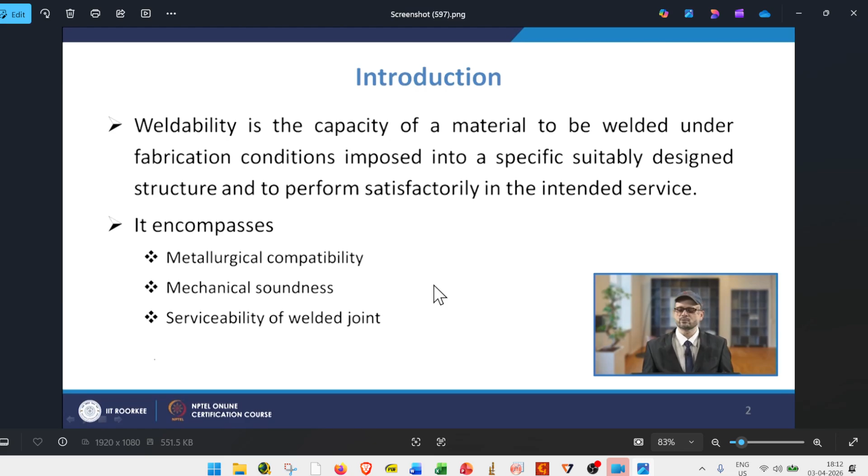if you do any tensile testing, the base metal should fail before the weld joint. That is the general consideration for good welding. Next is serviceability of the weld joint - in terms of corrosion or any other application we are using, it should be the same as the base material.

So what are the effects of alloying elements on weldability? If we have an alloy material with certain kinds of alloys, what effect does it have on weldability? First, it may increase the hardenability. If certain elements are there, carbon equivalent elements like chromium, nickel, and so on,

those may tend to promote the formation of the martensitic phase, resulting in hardenability. Also increasing hardenability from age-hardened precipitation - some particles may form due to age hardening, because we reach a certain temperature and hold it for a certain duration of time, so aging may take place and some precipitations may form.

Also providing grain refinement - some elements can promote grain refinement. And reducing segregation - some segregation of elements can be reduced, and controlling the ductile to brittle transformation temperature. Just like iron, if we go below 0 degrees, it transforms from ductile material to brittle material, so those things we have to control.

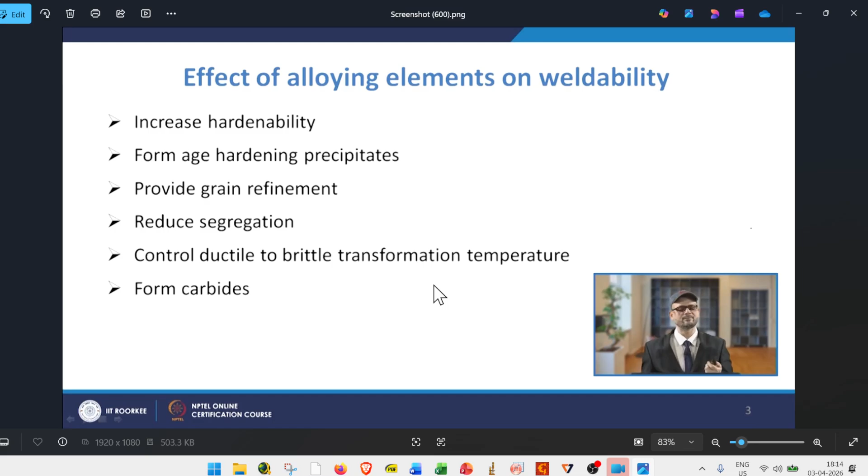So how do we do the weldability test? The purpose of the weldability test is to gather information about the behavior of the material during welding, for establishing the correct welding conditions. It provides useful information about appropriate process selection, preheating treatment required, energy input, and joint design. So the purpose of the weldability test is to see the material's behavior during welding conditions.

So we get information like what welding process we have to use, whether we have to use preheating or not, what energy input we have to provide, and what joint design we have to choose. Weldability tests may be classified as theoretical test, simulated test, and actual welding test.

Theoretical weldability test: in this case, we will do annealing, suppose in case of steels, up to 1150 degrees. Then we will cool it to replicate what happens during the welding condition, what kind of situation occurs. Once the heat annealing is done, we will do bending of that weld bead to 10 to 20 degrees.

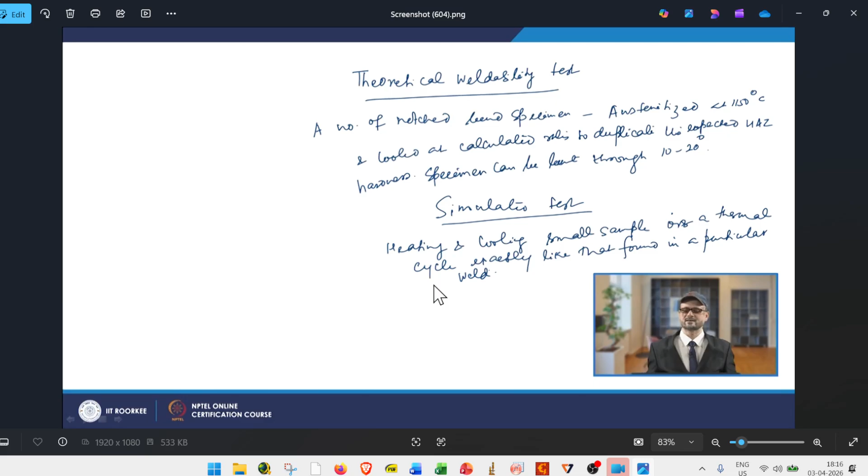Next, simulation test. In simulation test, we will use heating and cooling in small samples for a thermal cycle, and check the formation of the particular weld.

Weldability of the metal is best defined as option A, ease of melting the material; B, ability to form a solid sound weld joint with desired properties; C, resistance to corrosion; D, ability to conduct heat. The answer is not ease of melting the material.

Every metal with a low melting point doesn't mean it has good weldability, that is not correct. Resistance to corrosion, no, that is a material property, not related. Ability to conduct heat, no. So the answer is option B, the ability to form a sound weld joint with desired properties.

Weldability refers to the ease of producing a defect-free weld that meets mechanical and service requirements.

Next, which of the following is not a factor affecting weldability? A, chemical composition - yes, because whatever elements are present will affect weldability. Next, thermal conductivity - yes, if thermal conductivity is high, we have to provide more heat to the material, so that affects weldability. Next, surface roughness - no, because surface roughness doesn't affect weldability.

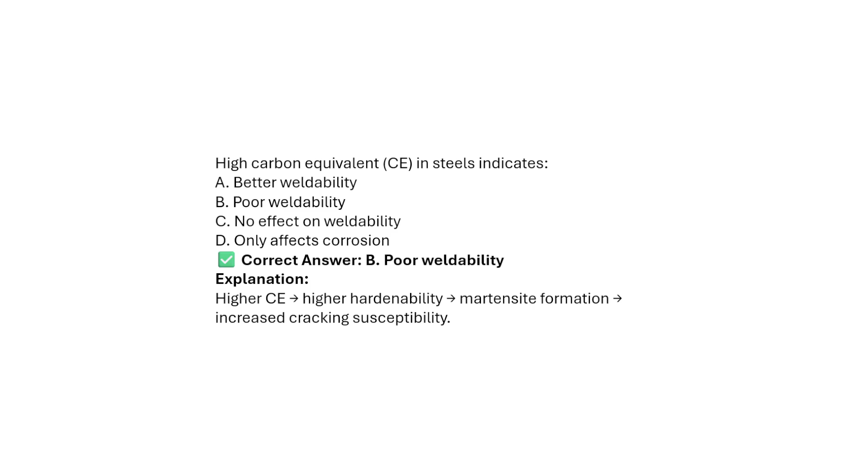Next, which of the following improves the weldability of steel? Which factor improves weldability in steel? Option A, increasing the carbon content. Option B, increasing the sulfur content. Option C, reducing the carbon equivalent. Option D, increasing the cooling rate.

The answer is reducing the carbon equivalent. If you reduce the carbon equivalent, there's less formation of metastable phase, less martensitic tendency, so less susceptibility to crack propagation. So option C, reducing the carbon equivalent. Lower carbon equivalent reduces hardness, which reduces crack tendency and improves weldability.

Which property of the metal strongly affects heat flow during welding? Option A, electrical resistance - if electrical resistance increases, heat generation will be more, but that is not the factor here. Next, thermal conductivity - yes. Option C, magnetic permeability. Option D, density. The correct answer is thermal conductivity.

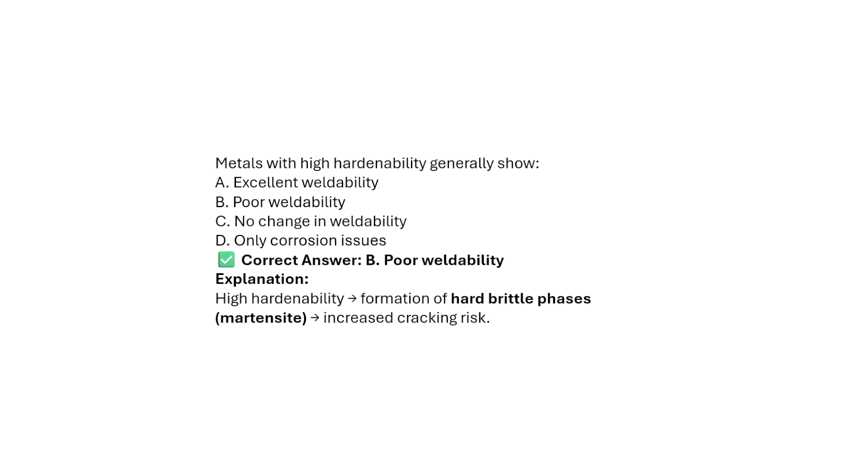Next, which of the following is a metallurgical factor affecting weldability? Option A, joint design. Option B, weld position. Option C, phase transformations. Option D, operational skills. The answer is phase transformation, since phase transformation like austenitic phase to martensitic phase strongly influences the microstructure and cracking.

Which test is commonly used to evaluate the weldability of steel? Option A, tensile test. Option B, hardness test. Option C, carbon equivalent calculation. Option D, impact test. The answer is carbon equivalent calculation.

As seen, if the carbon equivalent increases, it results in poor weldability, so we want to avoid that. We want to choose material with low carbon equivalent for good weldability. So the answer is C. Carbon equivalent calculation provides a quick estimation of weldability and crack tendency in steel.

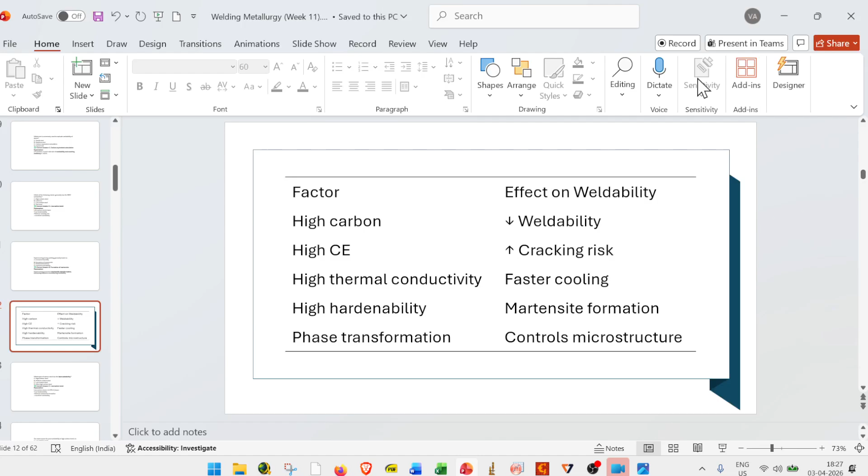Next we move to the next section: weldability of carbon steels. We can classify carbon steel into four categories: low carbon steel, mild steel, medium carbon steel, and high carbon steel.

Low carbon steel generally has carbon content less than 0.15%, used for sheets, strips, and welding electrodes. Mild steel is 0.15 to 0.3%, used for structural shapes and plates and bars, the most widely used material. Medium carbon steel is 0.3 to 0.5%, mostly used for machine parts and tools.

High carbon steel generally has 0.5 to 1% carbon content, used for springs, dies, and rails. From a weldability perspective, low carbon steel and mild steel generally have higher weldability because of low carbon equivalent content, but medium carbon steel is moderate and high carbon steel has poor weldability.

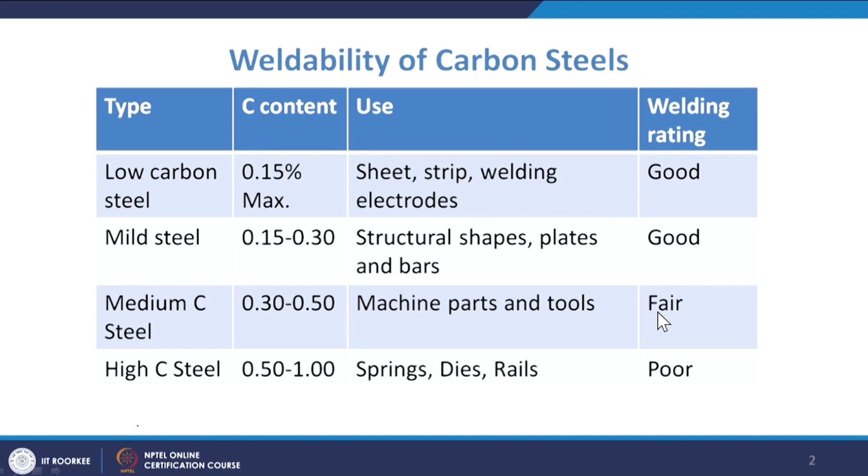Low carbon steels with carbon content up to 0.13% are good weldable steel, but not best for high speed welding, because high speed welding generally produces porosity. If the component isn't affected by porosity presence, then we can go for higher speed also.

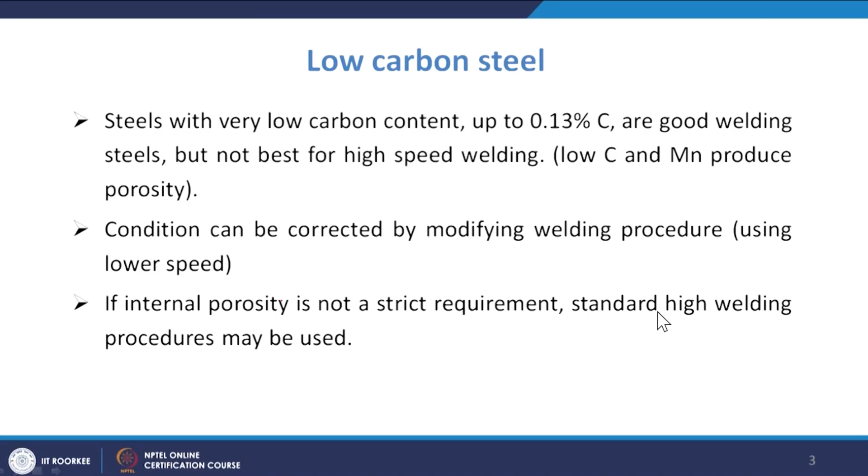This condition can be corrected by modifying the welding procedure, using lower speed. So if internal porosity is not a strict requirement, then standard high speed welding procedure may be used, since low carbon steels generally have good weldability.

Coming to mild steel, similar to low carbon steels, we can have excellent weldability with mild steel. So these are used in maximum production speed on assemblies and structures that required extensive welding. Where components require extensive welding, we can use mild steel because of its good weldability properties. Mild steel with 0.25 to 0.3 carbon content and 1.4 manganese has very good weldability.

Next, coming to the susceptibility to underbead cracking from hydrogen, it increases when carbon equivalent exceeds 0.4 percentage. So heavy sections may require preheating.

Why do we provide preheating? So that the cooling rate is reduced. If the cooling rate is reduced, the martensitic formation will be reduced. Less preheating is required when low hydrogen processes are used. Also, if the cooling rate reduces, any diffused hydrogen has enough time to diffuse out.

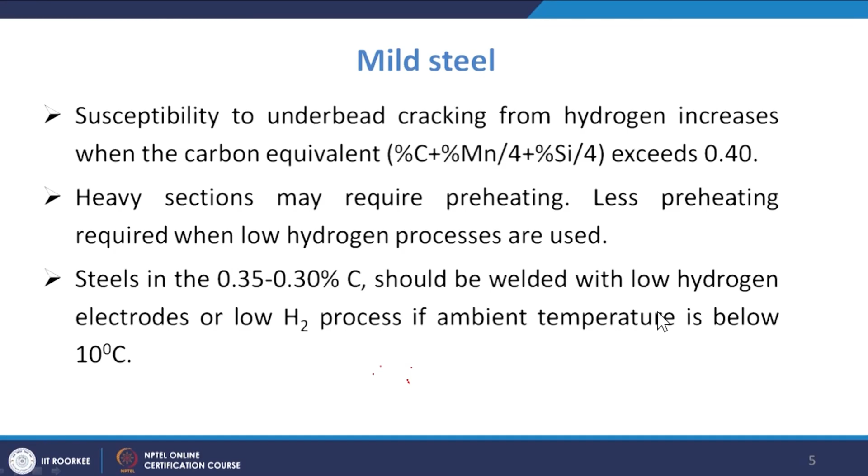Steel within 0.35 to 0.3 carbon content should be welded with low hydrogen electrodes or lower H2 producing electrodes if ambient temperature is below 10 degrees centigrade.

Similarly, medium carbon steel has moderate weldability. As carbon content is increased in the steel, welding procedures should be such as to avoid formation of large amounts of martensite in the HAZ.

Why is it moderate? The main problem is higher carbon content means higher carbon equivalent percentage, so hardenability increases, meaning martensitic formation is much higher. So we have to provide a certain environment so that we can reduce the formation of martensite. How can we reduce it?

One way is providing preheat treatment and slower cooling rate, that will result in slower cooling rate, and to reduce stresses we can do post weld heat treatment. In most applications, medium carbon steel should be preheated prior to welding to control the cooling rate in the weld metal and HAZ.

Preheat treatment depends on the carbon equivalent value, ranging from 0.45 to 0.6 percentage, and may require preheating temperature of 100 to 200 degrees, depending on the welding process and work thickness.

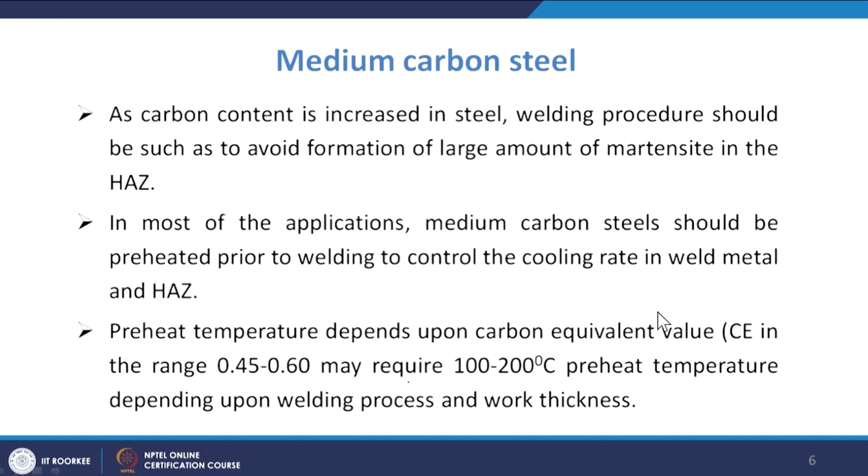For medium carbon steel, low hydrogen welding procedures are mandatory. In multi-pass welding, low heat input is recommended for the first few layers to limit the dilution.

Stress relieving post-weld treatment is recommended immediately after welding, especially in thick sections and high joint restraint, or service conditions involving dynamic loading.

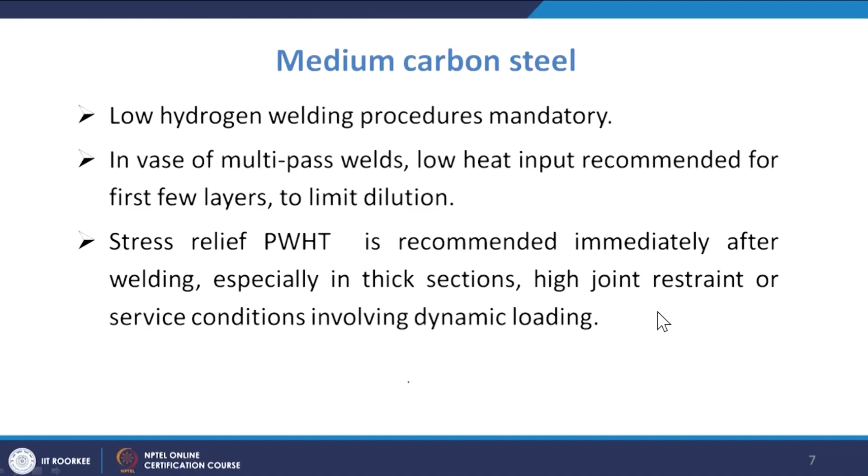Next, coming to high carbon steels. High carbon steels generally have poor weldability, as we've seen. If the carbon content is increasing, hardenability increases, and martensitic formation is more.

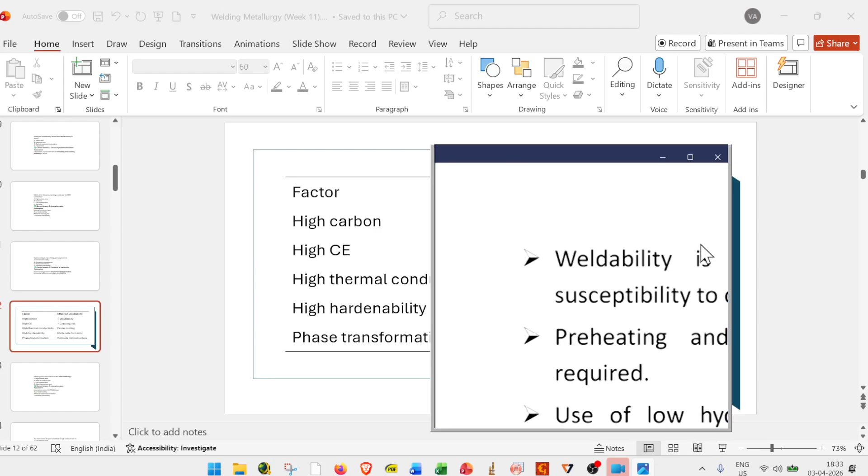To prevent that, if the carbon content is increasing, the preheat treatment requirement and its temperature also increases. In this case, preheat treatment requirement is 200 to 315 degrees, whereas for medium carbon steel it's 100 to 150-200 degrees.

Use of low hydrogen products minimizes the degree of preheat requirement. To reduce the pickup of carbon by the weld metal, the welding procedure should be designed to keep the dilution minimum. Generally if the dilution is more, more carbon element can be picked up from

the base material and HAZ into the weld material. So to minimize that, the weld procedure should be designed so that weld dilution is minimum.

High carbon steel should be welded in an annealed condition and then heat treated, and annealing is recommended prior to repair of broken welding parts. Post weld stress relief is recommended particularly for welding joints of thick sections.

As we said, if carbon content increases, we have to use much higher preheat treatment. If the carbon content increases, the preheat treatment temperature also increases.

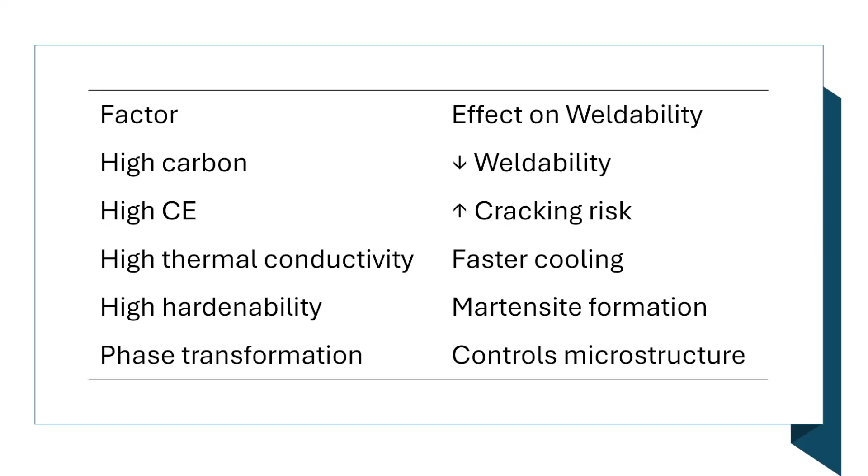Now we can move to some problem solving for this lecture. Which type of carbon steel has the best weldability? As we've seen, the one with lower carbon content has good weldability.

Option A is high carbon steel, option B is medium carbon steel, option C is low carbon steel, option D is ultra high carbon steel. The answer is C, since low carbon steel and mild steel both have good weldability.

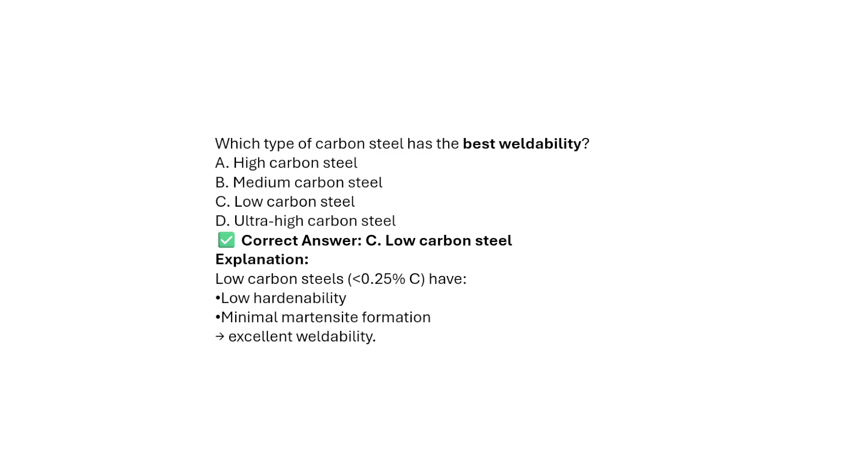Low carbon steel, with less than 0.25% carbon, has low hardenability, minimum martensitic formation, and excellent weldability. Next: what is the main reason for poor weldability in high carbon steel? Option A low melting point, option B high ductility, option C high hardenability, option D low thermal conductivity.

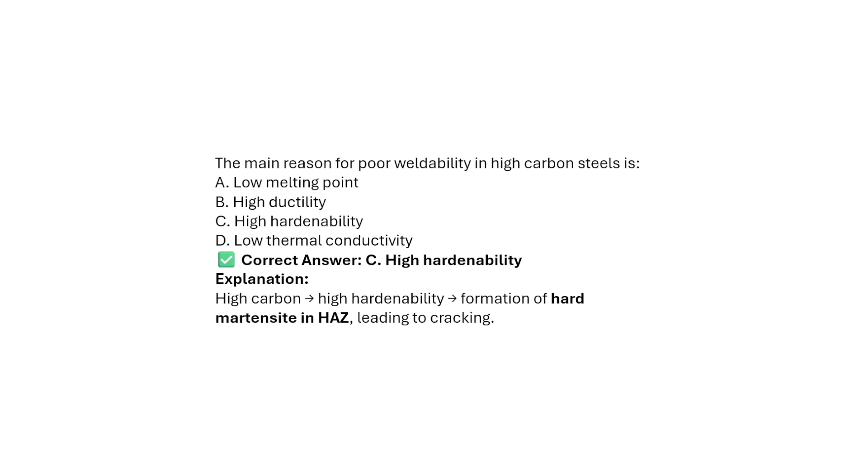The answer is hardenability, since it is the main factor affecting weldability. If carbon content increases, hardenability increases. So the answer is C, high hardenability. High carbon content results in higher hardenability, and formation of the hard martensitic phase in the HAZ leads to cracking.

Next, which phase is most undesirable in the HAZ of carbon steels? Option A ferrite phase, option B pearlite phase, option C austenitic phase, option D martensitic phase. The answer is the martensitic phase, because it generally has higher hardness and brittleness.

Because of its brittle nature, during cooling the weld metal will contract volumetrically. During that time, due to brittleness, it will break and a crack will initiate, resulting in failure of the material. So martensite, being hard and brittle, makes the weld prone to hydrogen cracking.

Next, carbon equivalent is used to estimate what? Corrosion resistance, weldability of the steel, electrical conductivity, or thermal expansion? As seen in previous questions, it is the weldability of the steel. If the carbon equivalent is higher, weldability is poorer. If carbon equivalent is lower, weldability is better with less tendency for crack formation.

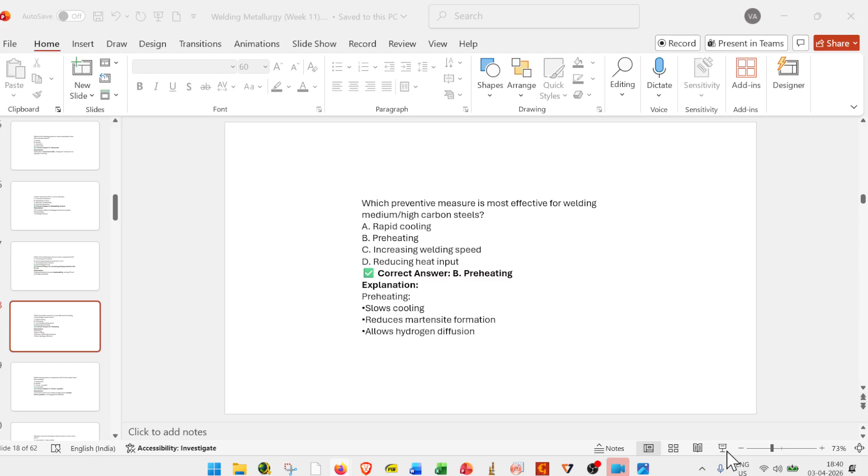Next, which microstructure is expected in the HAZ of low carbon steel after welding? Option A martensitic phase, B bainitic phase, C ferrite plus pearlite, D cementite. In case of low carbon steel, there is less hardenability, also in the HAZ, so the most probable answer is option C, ferrite plus pearlite.

In low carbon steel, the cooling is slow enough to form the ductile ferrite-pearlite phase, ensuring good weldability.

Hydrogen induced cracking in carbon steels is most severe when: option A low carbon plus slow cooling, option B high carbon plus rapid cooling, option C low carbon plus high ductility, option D high temperature plus low stresses. The answer is B, high carbon plus rapid cooling, since this condition produces the martensitic phase and traps hydrogen, resulting in higher crack risk.

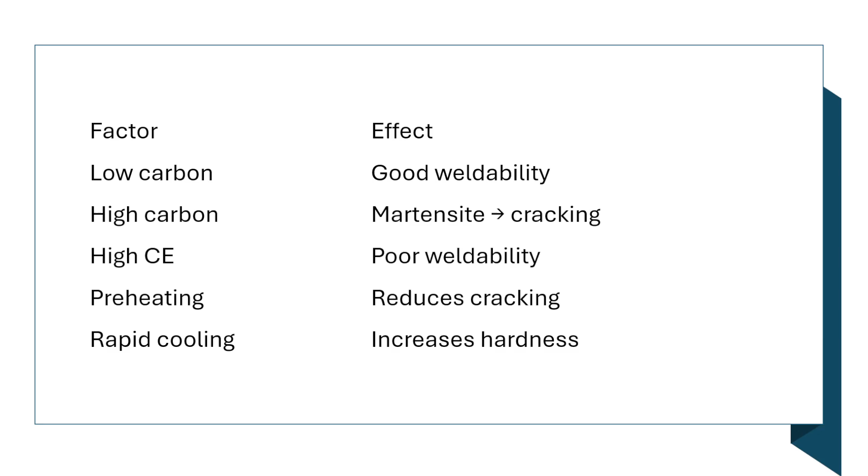Next we will look at alloy steels, specifically high strength low alloy steels. These are designed to provide better mechanical properties and sometimes better resistance to atmospheric corrosion than conventional carbon steels. Their weldability is similar to mild steel.

However, they often require preheat treatment and control of hydrogen in the welding process. Preheat treatment and interpass temperatures depend upon the carbon equivalent in the steel. If the carbon equivalent is high,

we have to increase the preheat and interpass temperatures. When welding two different high strength low alloy steels together, the higher of the two preheat treatments should be used. The base metal on each side of the joint should be heat treated over a distance equal to the section thickness or 75 mm, whichever is larger.

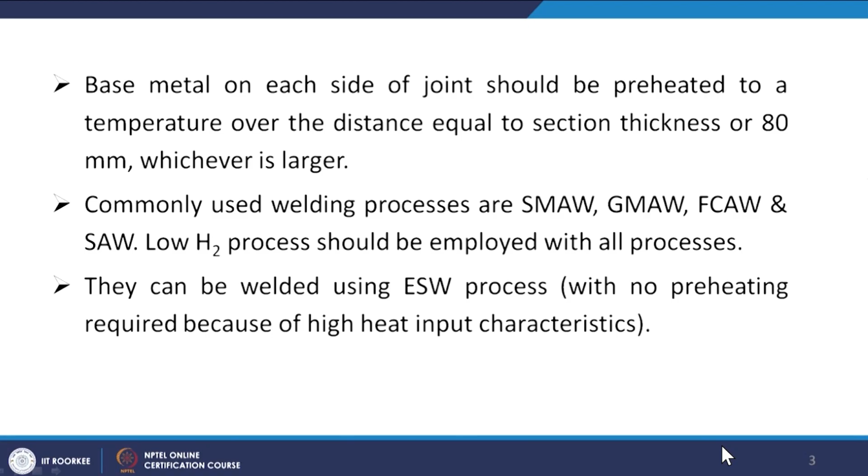Commonly used welding processes are SMAW (shielded metal arc welding), GMAW (gas metal arc welding), FCAW (flux core arc welding), SAW (submerged arc welding), and a low H2 process should be employed with all processes. They can also be welded using the ESW process (electro slag welding) with no preheat treatment required, because of high heat input characteristics.

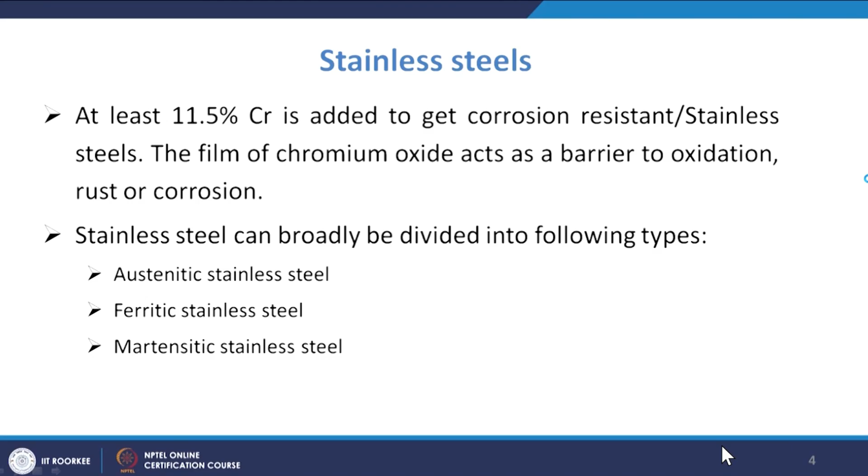Stainless steels can be broadly divided into austenitic, ferritic, and martensitic stainless steel. In austenitic stainless steel, carbon is generally 0.03 to 0.25 percent, manganese 2 to 10 percent, chromium 16 to 26 percent, silicon 1 to 2 percent, and nickel 3.5 to 22 percent. This nickel content makes it an austenitic phase stabilizer.

Next, ferritic steel has a low carbon to chromium ratio. Carbon is 0.08 to 0.2 percent, silicon 1 percent, manganese 1 to 1.5 percent, and chromium 11 to 27 percent. It has good ductility and good magnetic properties.

Next, martensitic stainless steel has a high carbon to chromium ratio, is magnetic in all conditions, and can be cold cracked. Carbon content is 0.15 to 2 percent, silicon 1 percent, manganese 1 percent, and chromium 11.5 to 18 percent.

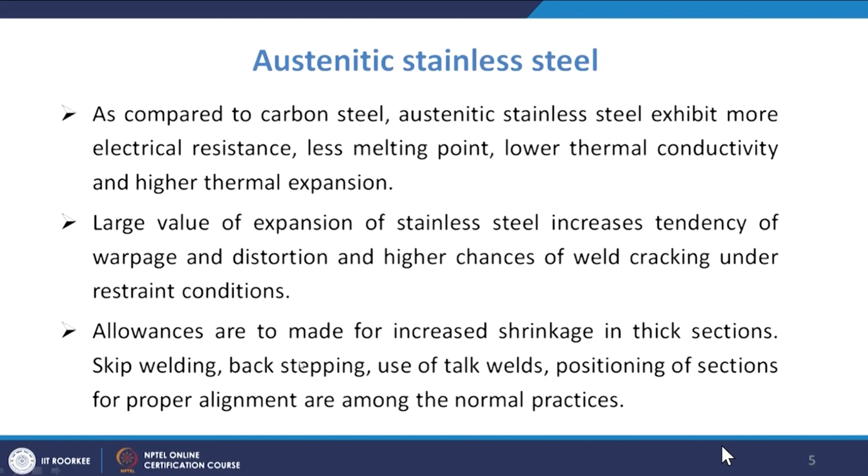When heated within the temperature range of 427 to 870 degrees centigrade and cooled slowly through that range, carbon is precipitated from the solid solution at the grain boundaries, where it unites intergranularly with chromium to form chromium-rich carbides. The formation of these carbides effectively eliminates much of the chromium from adjacent areas, lowering corrosion resistance and increasing susceptibility to localized intergranular attack.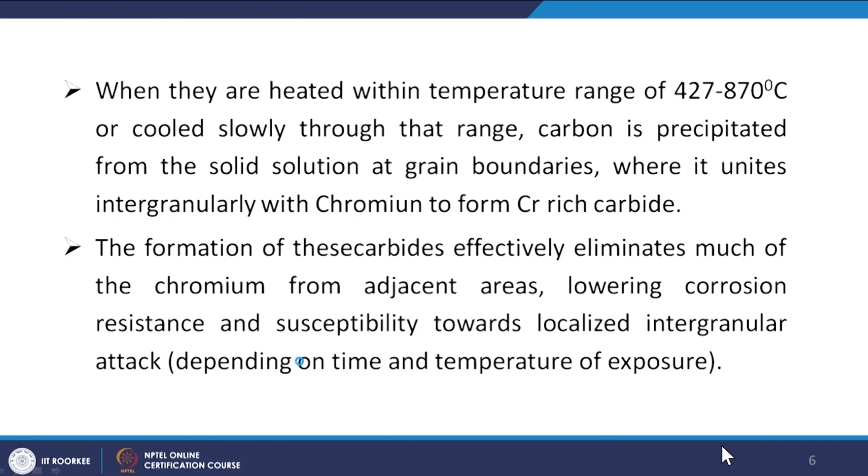Carbide precipitation during welding of austenitic stainless steel can be minimized by reducing time in that temperature range, selecting stainless steel with lower carbon content, and addition of carbide-forming elements like titanium, which forms carbides more prominently than chromium, so chromium is retained. Appropriate heat treatment is also used to avoid intergranular corrosion, like adequate holding time, rapid cooling through 925 to 538 degrees centigrade, and cooling in air or water depending on thickness.

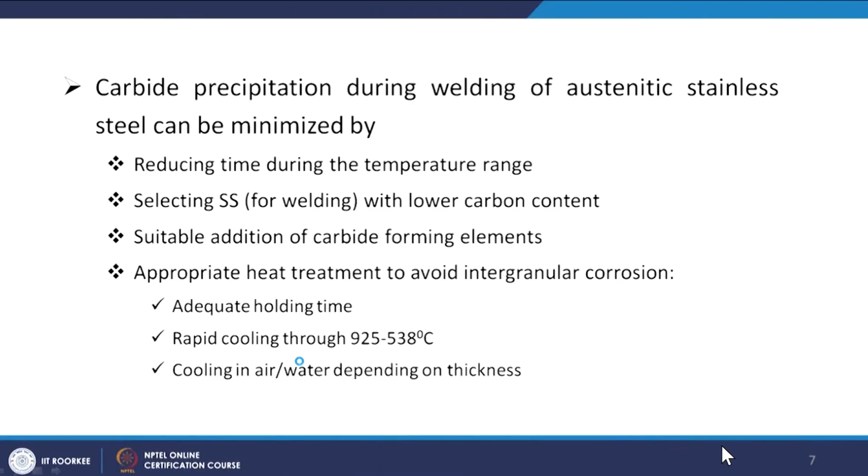Next, coming to ferritic and martensitic stainless steel. Welding characteristics of ferritic and martensitic stainless steels are different from carbon steels, and also from austenitic stainless steel, because of the following factors.

Ultimate tensile strength decreases rapidly with temperature, and pronounced grain growth occurs in excess of 900 degrees centigrade. Melting point is below that of carbon steel, expansion coefficient is the same as carbon steel, and thermal conductivity is less than half of carbon steel.

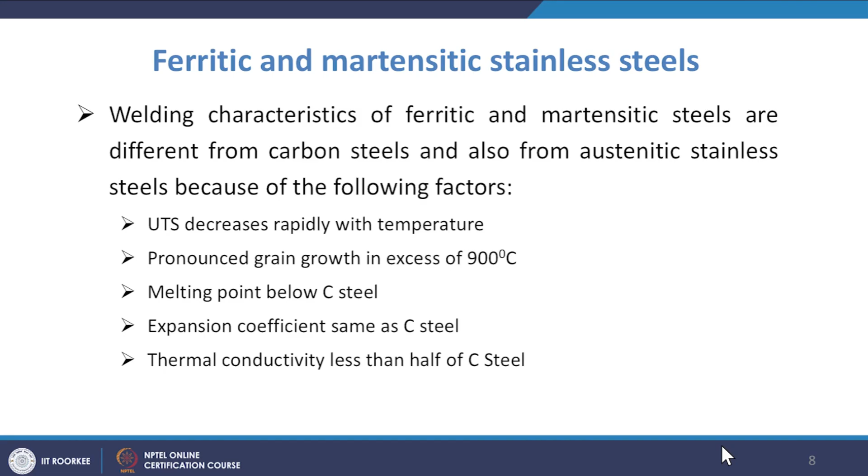Welding of ferritic stainless steel: in general, these steels are less weldable than austenitic stainless steel. When heated above 954 degrees centigrade during welding, growth of ferritic grains is prominent. The larger grain size of ferrite along with a small amount of martensite induces brittleness and lack of toughness and ductility at room temperature in the weld. To minimize grain growth, the preheating and interpass temperatures in weld heat treatment are kept as low as possible.

Grain coarsening can be controlled by avoiding slow cooling from the welding temperature, since intergranular precipitation occurs if cooled too rapidly. Hence heat treatment at 700 to 820 degrees followed by cooling at a moderate rate is the corrective treatment. Preheat treatment at 150 to 210 degrees is suggested, and post-weld treatment temperatures are kept usually below 843 degrees centigrade to prevent grain growth and austenitic formation beyond the heat affected zone.

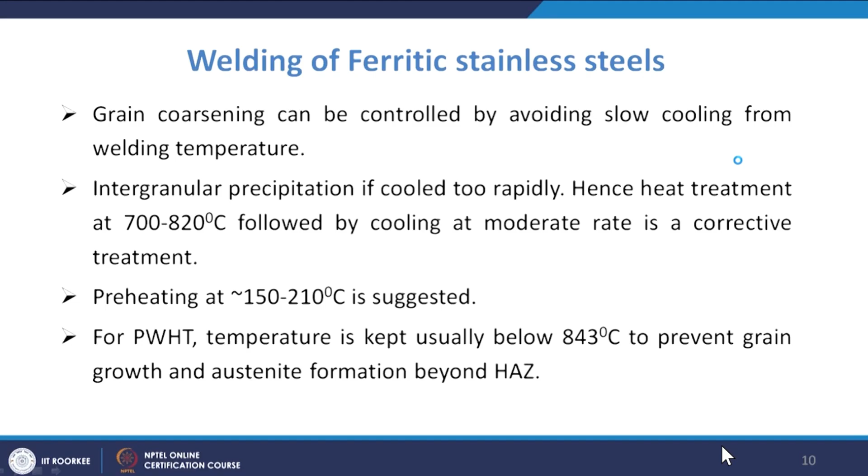Coming to the final one, welding of martensitic stainless steel. During welding, when martensitic stainless steel is heated, austenite forms, and subsequent rapid cooling generally generates large amounts of transformation stresses because martensite has larger volume compared to the austenitic phase. The chance of cracking increases because of the low value of thermal conductivity, especially with brittle microstructure formation by rapid cooling rate. For reducing transformational stresses and increasing toughness and ductility, preheating and post-weld heat treatment are suggested for martensitic stainless steels.

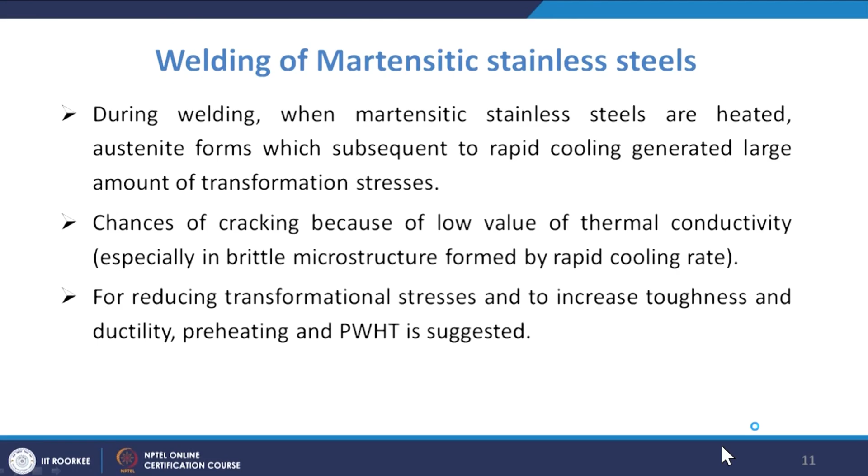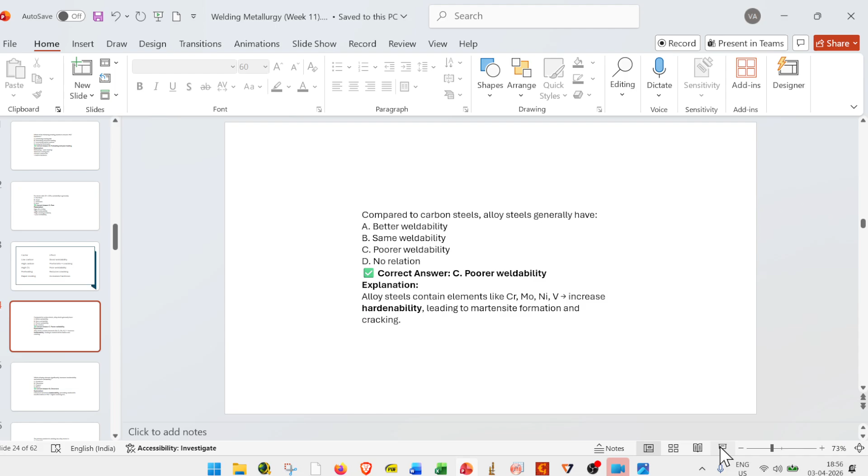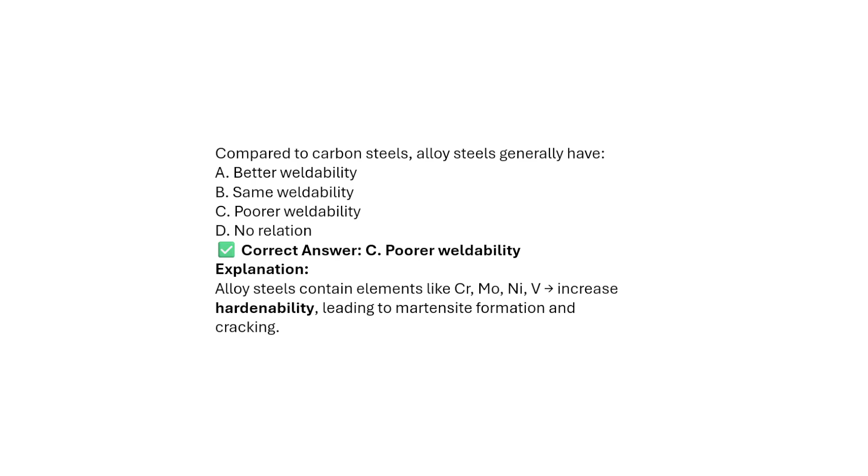Let's see some problems. Compared to carbon steels, alloy steels generally have: better weldability, similar weldability, poor weldability, or no relation? The answer is C, poor weldability. Generally, low carbon steels have higher, good weldability. Alloy steels contain chromium, molybdenum, nickel, and vanadium, and these increase hardenability, leading to martensitic formation and cracking.

Which alloying element significantly increases hardenability and reduces weldability? Option A, aluminum. Option B, chromium. Option C, copper. Option D, silicon. The answer is chromium. As we've seen, chromium, molybdenum, vanadium, and nickel are strong carbide formers that mostly increase hardenability, promoting martensitic formation, which reduces weldability. Among these elements, chromium increases hardenability and promotes martensitic transformation in the HAZ, raising the crack risk.

The primary problem in welding low alloy steel is: Option A, corrosion. Option B, hydrogen induced cracking. Option C, grain refinement. Option D, oxidation. The answer is option B, hydrogen induced cracking. Due to higher hardenability, alloy steels are prone to hydrogen cracking, especially in the heat affected zones.

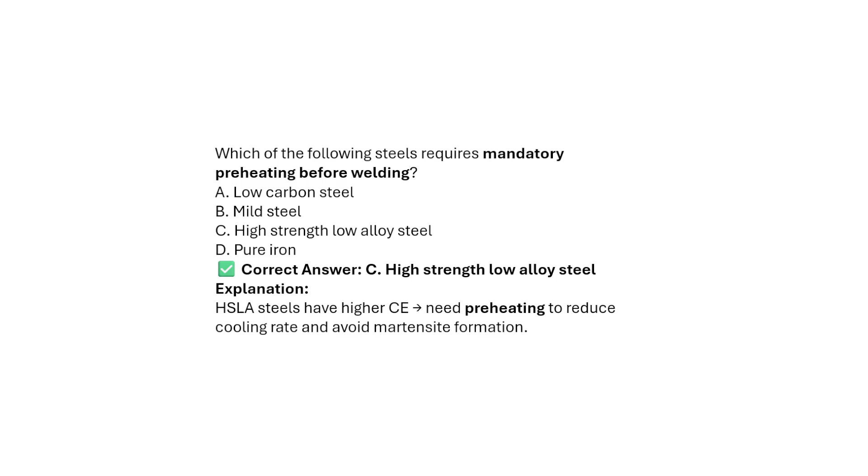Which microstructure is commonly formed in the HAZ of alloy steel during rapid cooling? Options: A, ferrite; B, pearlite; C, martensite; D, austenite. The answer is martensite, since faster cooling means formation of martensite.

Which of the following improves the weldability of alloy steels? Options: A, increasing the cooling rate; B, preheating; C, increasing the alloy content; D, reducing the heat input. The answer is preheating. Preheating improves weldability by reducing the cooling rate. If the cooling rate reduces, formation of the martensitic phase reduces, giving good weldability. So preheating reduces the cooling rate, prevents martensitic formation, and allows hydrogen to diffuse out.

Next, which type of cracking is most critical in HSLA welding? Options are solidification cracking, hydrogen cracking, liquation cracking, and crater cracking. The answer is hydrogen cracking, because due to high strength and hard microstructure, hydrogen cracking is the most severe issue. Hydrogen cracking is nothing but cold cracking or delayed cracking.

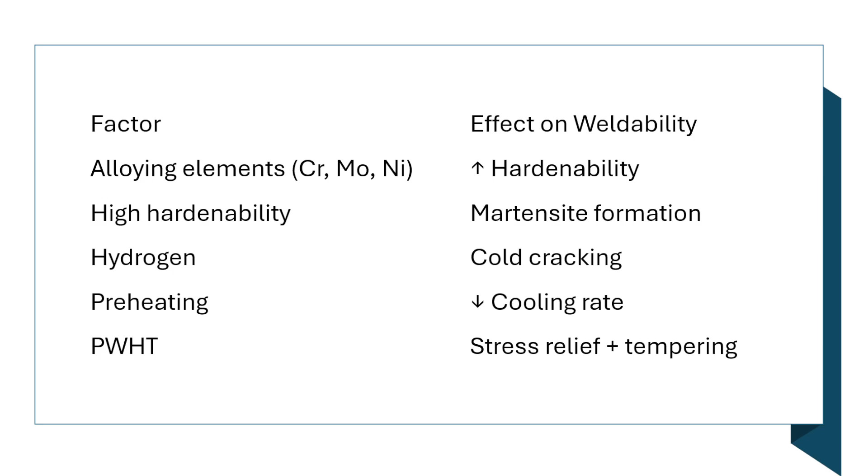Increasing the alloying elements generally shifts the CCT curve, the cooling curve, to the right. If the C curve shifts right, martensitic formation becomes more. So a few crucial points: alloying elements like chromium, molybdenum, and nickel increase hardenability. Higher hardenability means more martensitic formation, and if hydrogen is present in the alloy, it results in cold cracking. Preheat treatment can be used to reduce the cooling rate, which increases weldability, and post weld heat treatment provides stress relieving and tempers the martensitic phase.

Next, coming to the welding of cast iron.

Cast iron is a family of ferrous alloys, normally containing more than 2% carbon content and 1 to 3% silicon, as well as small elements of sulfur and phosphorus. There are four major types of cast iron: gray cast iron, which is weldable; white cast iron, which is not normally weldable; and malleable and nodular cast iron, which are weldable but require post weld heat treatment.

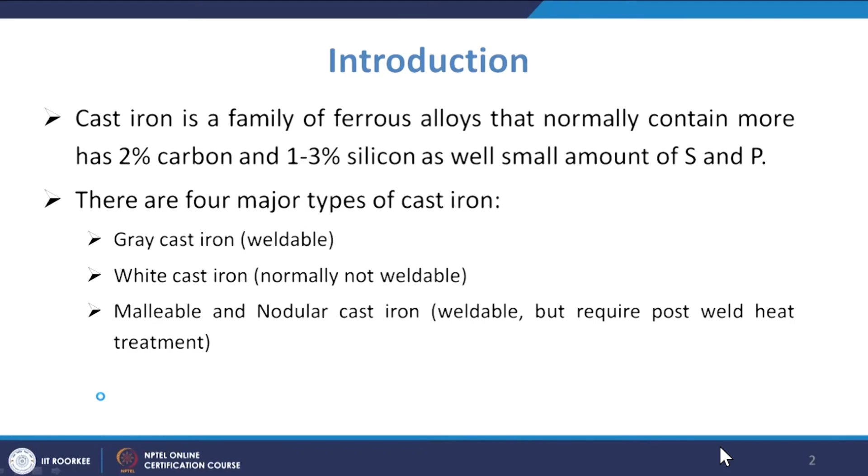Gray cast iron is difficult to weld economically because major applications are repairing castings in the foundry, repairing cast damage in service, and joining separately cast sections. Malleable cast iron welding destroys the advantage of annealing treatment. Nodular cast iron welding involves changes due to magnesium loss, and minimizing heat input avoids graphite degradation.

The welding characteristics of gray cast iron are such that in the weld pool, the cooling rate determines whether carbon goes into the combined state or remains in free form. The cooling rate is reduced by preheating the part to a temperature of 600 to 700 degrees centigrade, and also by cooling slowly.

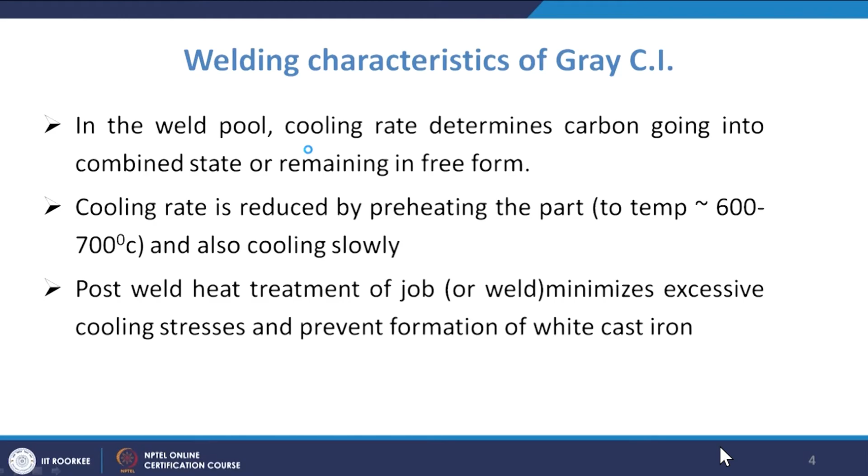Post-weld heat treatment of the job minimizes excessive cooling stresses and prevents the formation of white cast iron. In grey cast iron, we have graphitic flakes. If we do faster cooling, it will convert into white cast iron.

Other techniques in welding of grey cast iron include use of suitable non-ferrous electrodes with a lower melting point than the grey cast iron.

Use skip welding technique to minimize heating of the gray iron component. In arc welding, direct the arc upon already deposited weld metal. In gas welding, flame should be directed on the welding rod, not directly on the weld bead.

Filler metal should have a coefficient of thermal expansion similar to that of the grey cast iron.

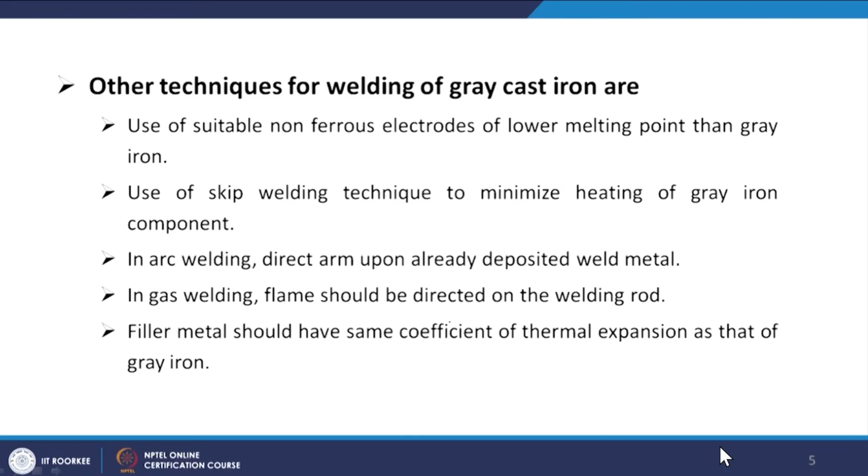Welding procedures applied for grey cast iron include SMAW shielded metal arc welding, gas metal arc welding, flux core arc welding, oxy-fuel gas welding, brazing, and thermite welding.

Preheating is done to decrease the cooling rate, and preheat temperatures depend on factors like the type of cast iron being welded, mass of the casting, welding process employed, and type of filler metal used.

All cast irons should be preheated during oxy-fuel gas welding to reduce heat input requirement.

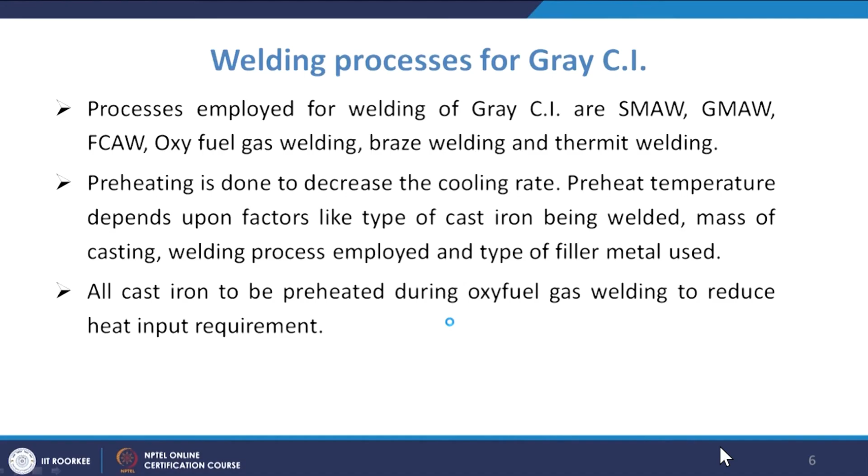Local preheating should be gradual to avoid cracking, especially in complex castings. Cast irons are welded with nickel and nickel alloys, mild steel, and copper alloy covered electrodes.

Root opening should be wide enough to permit good fusion into the root face and into the backing plate if used. For butt welding with V edge preparation, use 60 to 80 degree groove angle, and for thicker sections, U grooves with 20 to 25 degree groove angle and 5 to 6.6 mm root radius.

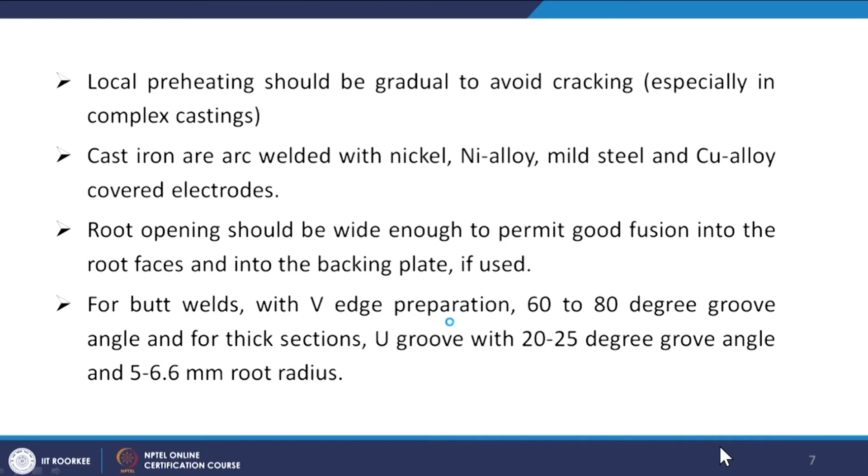When repairing a crack in a casting, a hole of 3.5 mm or larger diameter should be drilled at the end of each crack to prevent its further propagation.

Electrodes should be manipulated so that bead width is not greater than 3 times the nominal diameter of the electrode.

For filling large cavities, the sides should be buttered with weld metal first, then the cavity gradually filled towards the center of the repaired area.

Backstep welding sequence provides better results for larger castings to reduce strain caused by deposition of long beads. Deposition of weld metal should be in short lengths, allowing each bead to cool down before laying the next.

Upsetting and peening of the deposited weld metal lightly before it cools and contracts is another alternative. Combination of short welds and peening is the best practice. Buttering and studding are methods for getting sound strong welds.

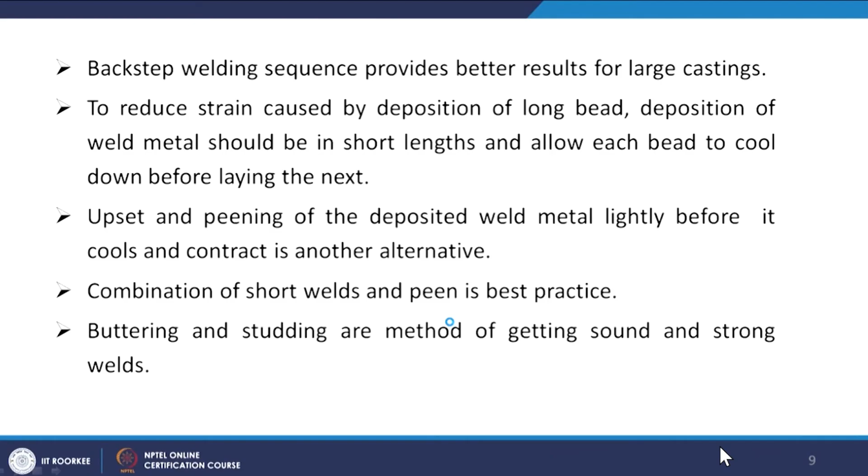So these are some other methods we can use: drilling holes to prevent crack propagation, and suggested sequences like step sequence and backstep sequence welding so that heat distribution will be uniform.

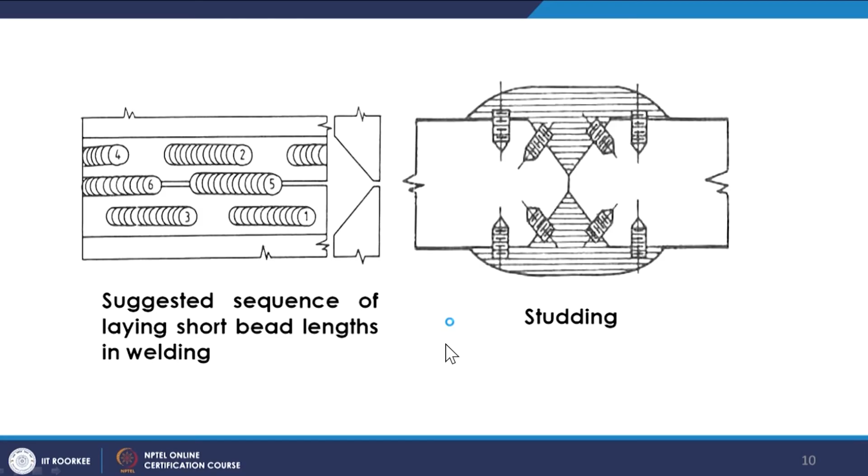Post weld thermal stress relieving treatment is desirable for fully restrained welds and welds intended for severe service conditions, and those subjected to close machine tool tolerance.

This is done normally immediately after welding. If the casting is welded with high preheat and interpass temperatures, it should be slowly cooled by covering it with an insulating blanket or hot sand.

So this is it. Now we can see some other problems from this.

The weldability of cast iron is generally: excellent, good, poor, very high? The answer will be C, it is poor. Cast iron has high carbon content, is brittle in nature, and tends to form a hard phase, which makes welding difficult.

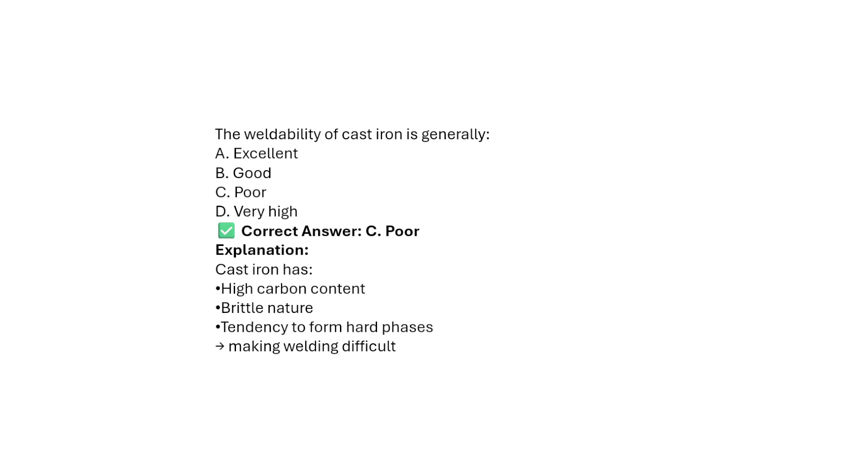Which of the following is the main reason for poor weldability of cast iron: low thermal conductivity, high carbon content, high ductility, or low melting point? The answer will be high carbon content. High carbon content leads to formation of cementite, that is white iron, which hardens and becomes brittle in the heat affected zone.

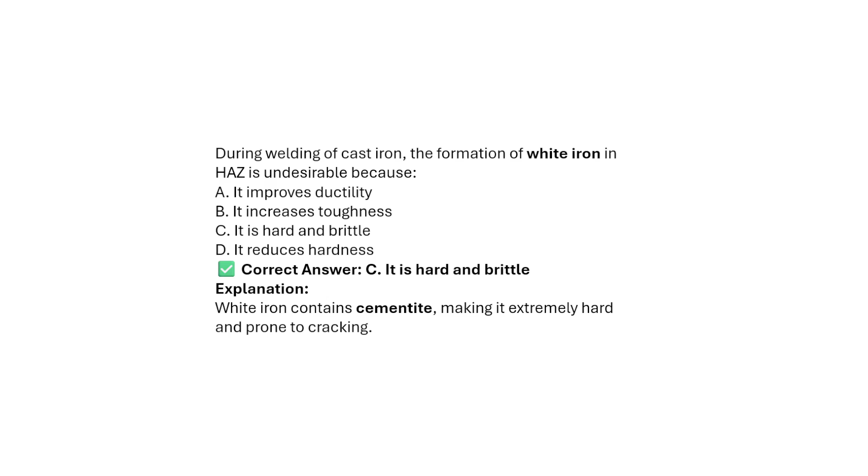Which type of cast iron has relatively better weldability? White cast iron, grey cast iron, chilled cast iron, alloyed cast iron. The answer is grey cast iron. The graphitic flakes in grey cast iron provide stress relief, improve machinability, and give slightly better weldability.

Preheating in cast iron welding is primarily used to reduce the thermal gradients. Preheating reduces thermal stresses, prevents cracking, and minimizes white iron formation.

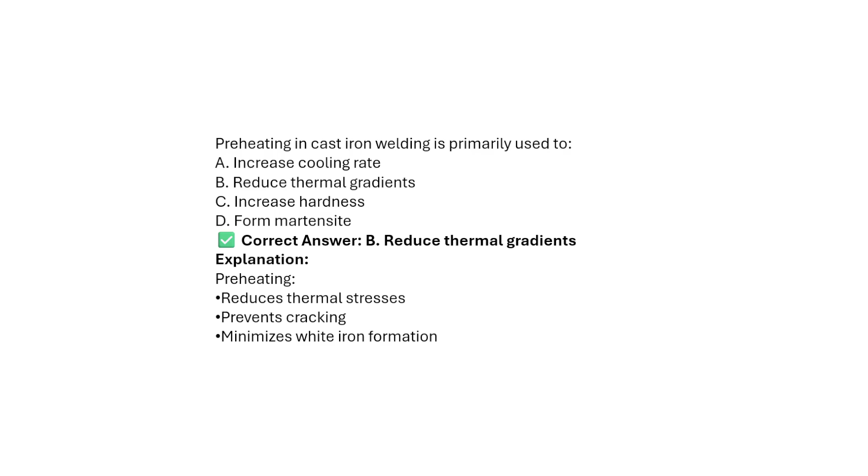Which filler metal is commonly used for welding cast iron? Copper, nickel base electrode, aluminum, or titanium? The answer is nickel base electrodes. Nickel electrodes provide ductile weld metal, reduce cracking, and accommodate carbon.

Rapid cooling during cast iron welding leads to graphitization, formation of ferrite, formation of white iron, or increased ductility? The answer is formation of white iron. Faster cooling suppresses graphite formation, resulting in carbon forming cementite and white iron.

Which welding technique is preferred to minimize cracking in cast iron? High heat input welding, cold welding technique, rapid quenching, or continuous welding? The answer is cold welding technique, using low heat input and intermittent welding, which reduces thermal stresses and prevents cracking.

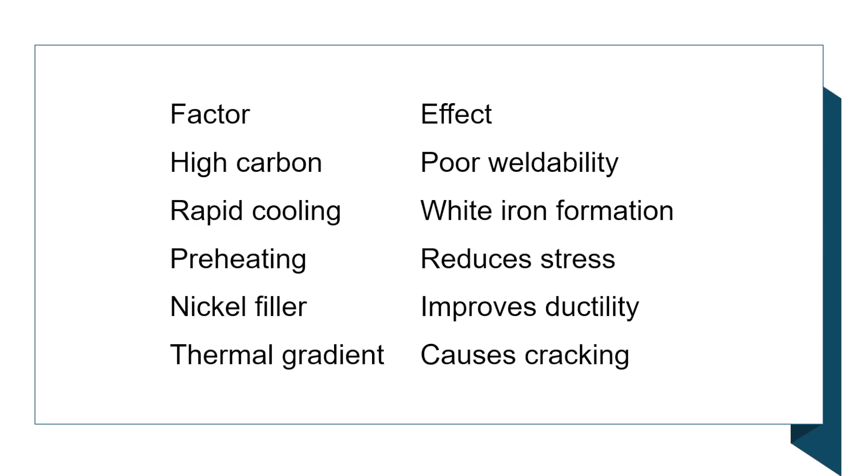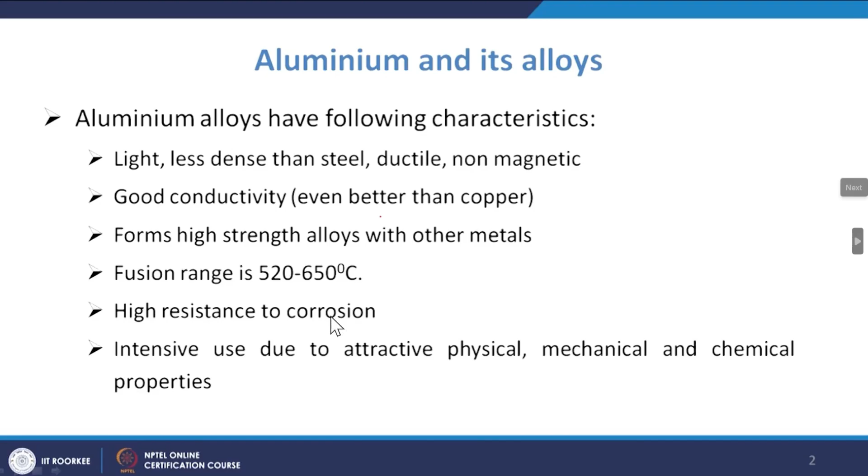When welding aluminum and its alloys, the thin oxide film present on the surface must be removed chemically and mechanically before welding, since this oxidation film forms rapidly during welding. The thin film may contain moisture which can react during fusion welding and liberate hydrogen, forming porosity. Because of good heat conduction, heat dissipation is very fast.

The thin oxide film on aluminum, combined with its high coefficient of linear expansion, may lead to distortion and buckling if proper care is not taken. It is prone to cracking because of low strength at the solidus; heat treatable alloys show a greater tendency to crack.

Aluminum does not show any color change on heating, so it is difficult to judge when the metal begins to melt and proper welding temperature has been reached. Indicators are the melting of dry flux and the blistering of the metal surface.

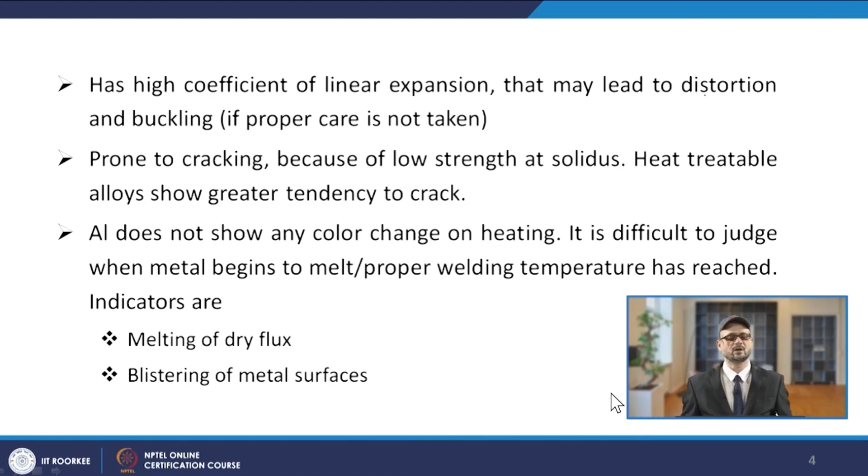Coming to the next class of alloys, copper and copper alloys have excellent corrosion resistance, electrical and thermal conductivity, and formability. High strength and corrosion resistance make them desirable for marine applications because of good wear resistance, high hardness, and corrosion resistance. They are used for surfacing of metals and can be soldered, brazed, or welded.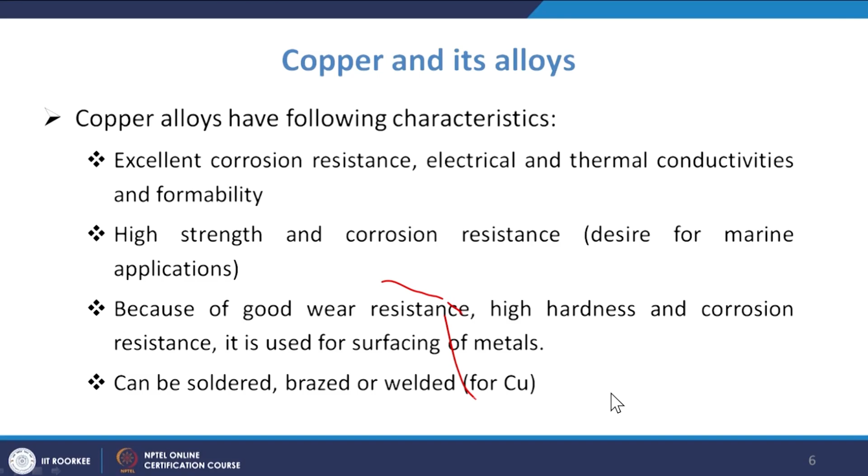High thermal conductivity necessitates high heat input into the parent material, so preheating of the parts may be necessary. The greater coefficient of thermal expansion may induce residual stresses, so it is advisable to use slow welding speed and cover the weld joint with insulating material. There is a tendency to absorb oxygen, so to avoid oxidation problems, suitable flux or inert gas is necessary.

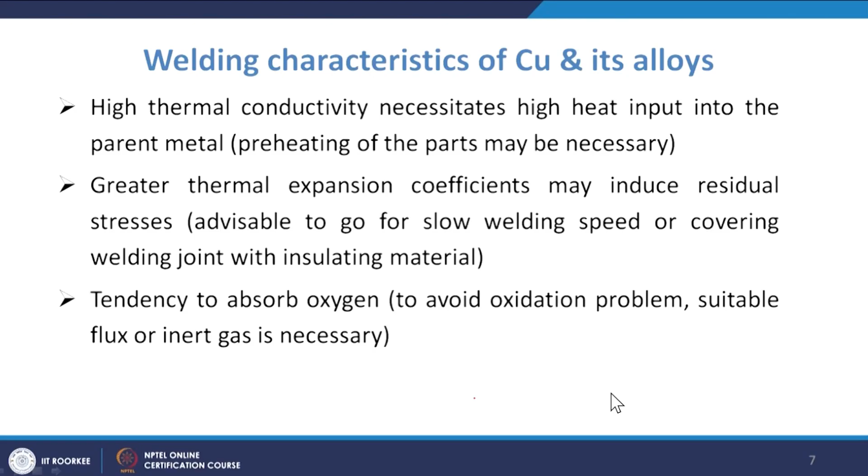Some of the welding processes we can use for copper are tungsten inert gas welding, metal inert gas welding, brazing, and soldering.

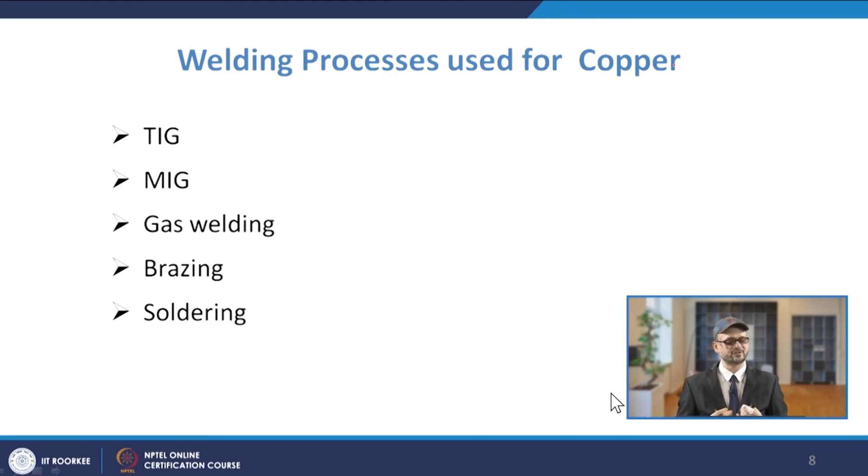Magnesium is another kind of alloy. Magnesium has a high strength to weight ratio, good fracture strength, high dimensional stability in service, good damping capacity, high thermal conductivity, and good electrical conductivity.

Most magnesium alloys are readily weldable. Weldability of magnesium alloy is mostly affected by oxidation, high thermal conductivity and thermal expansion, susceptibility to hot cracking, hot shortness, grain growth and aging. Stress corrosion occurs for alloys with more than 1.5 percentage aluminum, so surface preparation is important.

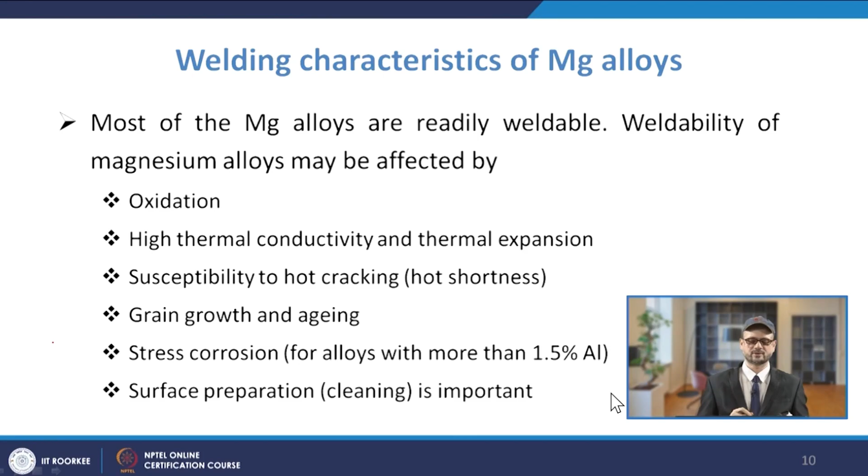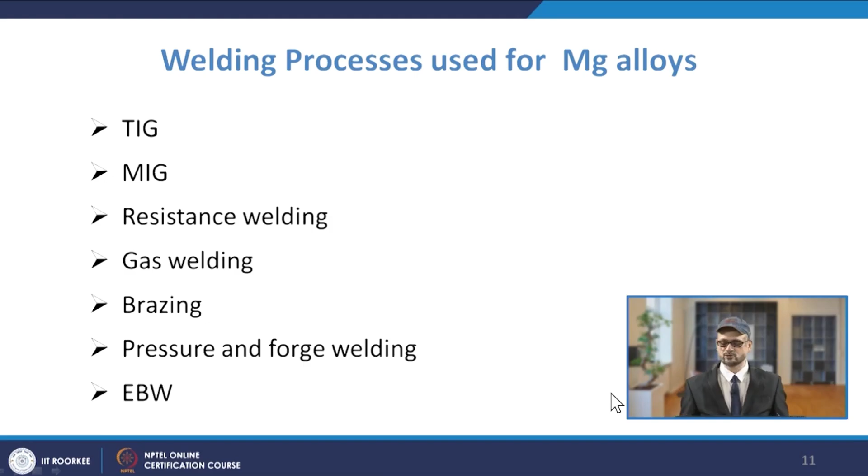Which process can we use? Tungsten inert gas welding, metal inert gas welding, resistance welding, gas welding, brazing, pressure and forge welding, and electron beam welding. Okay, this is all about the non-ferrous materials.

So which of the non-ferrous metals is most difficult to weld due to high thermal conductivity and the oxidation layer? Options: A copper, B aluminum, C magnesium, D nickel. The correct answer is aluminum. Aluminum has high thermal conductivity that results in rapid heat loss, and a stable oxide Al2O3 with a high melting point that is difficult to fuse.

So the generally preferred welding process is TIG welding with AC current, so that during the reverse polarity cycle, oxidation cleaning takes place.

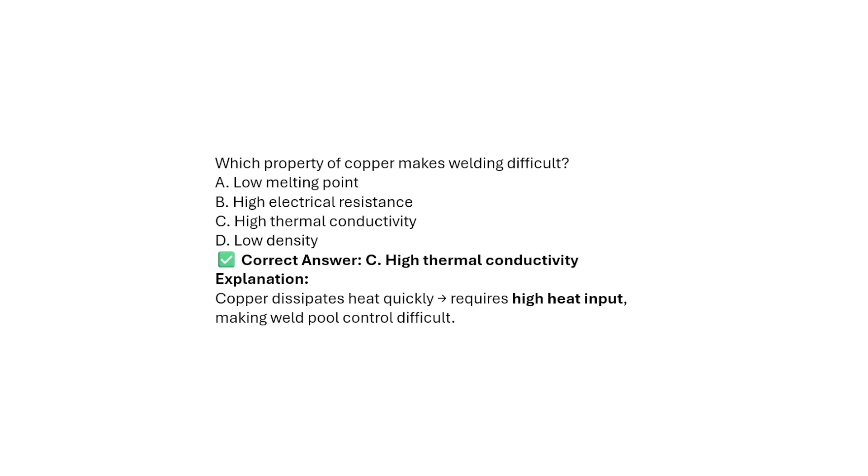That results in good welding. Which property of copper makes welding difficult? Low melting point, high electrical resistance, high thermal conductivity, or low density? The answer is high thermal conductivity. Copper dissipates heat quickly, requires high heat input, and makes weld pool control difficult.

The oxidation layer on aluminum has a melting point: lower than aluminum, same as aluminum, much higher than aluminum, or 0 degrees? It is much higher than aluminum. Al2O3 melts at 2050 degrees centigrade, while aluminum melts at 660 degrees centigrade, so it prevents proper fusion unless removed.

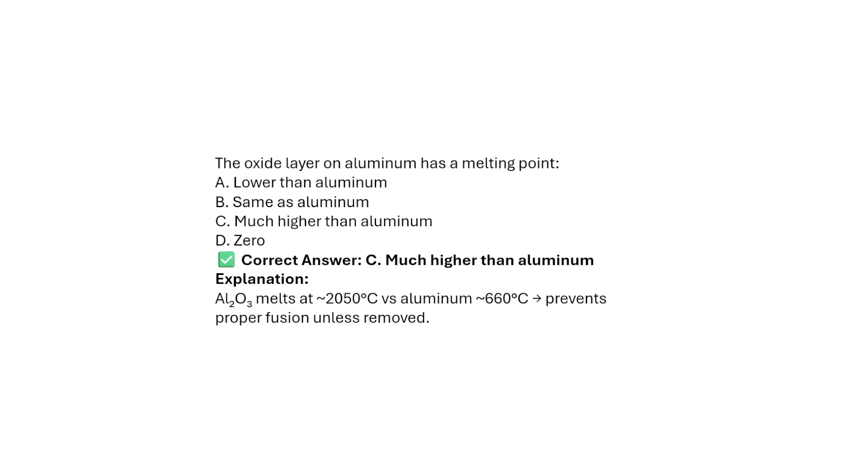Which process is most suitable for welding aluminum? SMAW, submerged or shielded metal arc welding, TIG welding with AC current, oxy fuel welding, or resistance welding? The correct answer is TIG welding with AC current. AC current breaks the oxidation layer, causing a cleaning action and providing a stable arc for aluminum welding.

Which non-ferrous metal has the highest susceptibility to porosity due to hydrogen absorption? Options: copper, aluminum, nickel, zinc. The answer is aluminum. Molten aluminum dissolves hydrogen, and during solidification there is gas rejection and porosity formation.

Which alloy system is prone to hot cracking due to a wide solidification range? Pure metals, eutectic alloys, alloys with a wide freezing range, or single phase alloys? The answer is C, alloys with a wide freezing range. A wide freezing range extends the mushy zone and weakens grain boundaries, resulting in hot cracking.

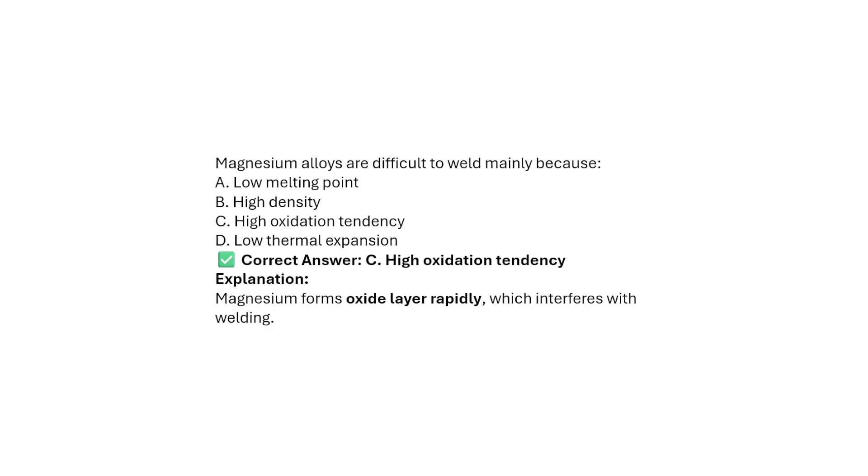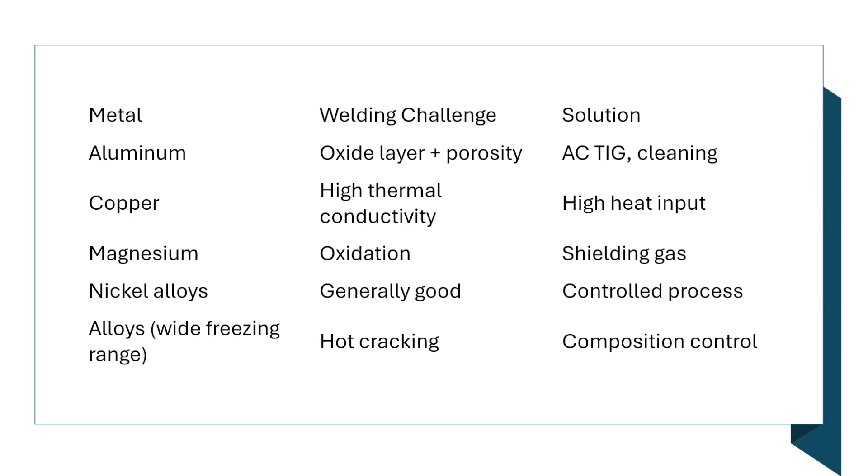So here are some key points. Aluminum: the problem we face is oxidation layer and porosity, and the solution is AC TIG and cleaning. Copper: high thermal conductivity, which we can avoid with high heat input or an insulating blanket. Magnesium: oxidation is the major problem, avoided by providing shielding gas. Nickel alloys generally have good controlled processes. Alloys with wide freezing range cause hot cracking, avoided through compositional control. Okay, that's it for today.